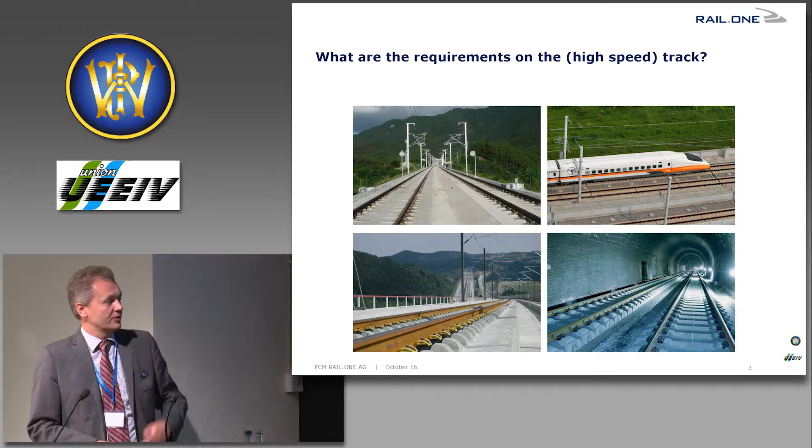Finally, we expect the perfect alignment. To drive 300, 350 kilometers per hour, finally the only requirement is the alignment. If we have the perfect alignment, the lifetime of the slab track will increase, we get much less problems. This is independent whether we have a quite straight alignment, something on bridges, or this very extreme alignment on Cologne-Frankfurt following very close to the highway, or even restoration of old tunnels.

This was also shown by May already, more or less, what interfaces do we have? We have interface to rolling stock, we have different types of trains, we have lines which are just high-speed lines, and we have lines with commuter trains combined with high-speed lines.

Then we have static dynamic interaction coming also from different speeds, different trains, and airborne noise, track equipment - we have to install a lot of stuff in the track. We need compatibility with the signaling system, with the power supply. But this is all stuff which we can more or less handle in the track, we know it.

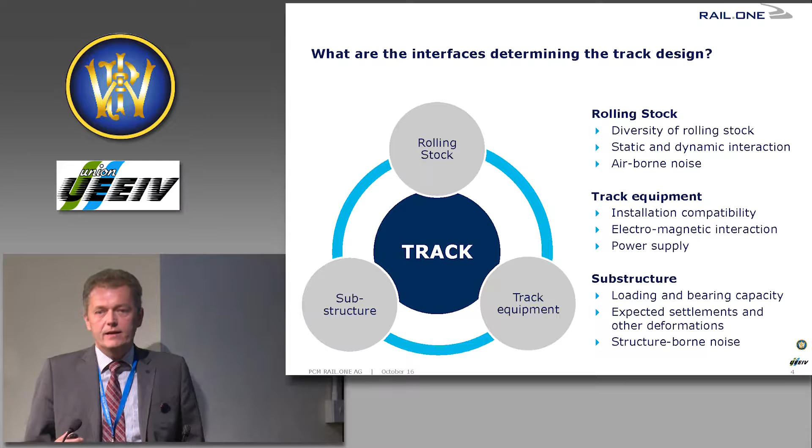The only one we cannot handle anymore after the installation is the substructure. If we don't make it correctly, we cannot correct it. We are lost.

Here two major points are bearing capacity and expected settlements, and I would say the deformation. I would explain later why I see it a little bit wider.

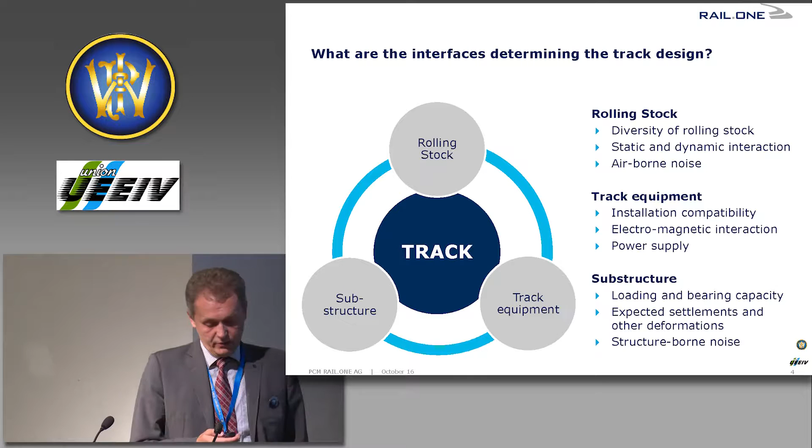What are the characteristics of the slab track? What does the operator later expect? Low maintenance, high availability - of course, I'd like to operate it maybe 20 hours a day, I don't have time for maintenance. Increased service life, lower life cycle costs - we're talking about 60, in the meantime 80, 100 years of operation of the slab track.

Also here, low structure height and weight of the slab track - am I able to improve or simplify the construction of civil structures, bridges, due to the slab track, yes or not? Finally, high lateral resistance. We design the tracks for 200, 250, 300 km per hour, but maybe later we expect to drive faster on those tracks.

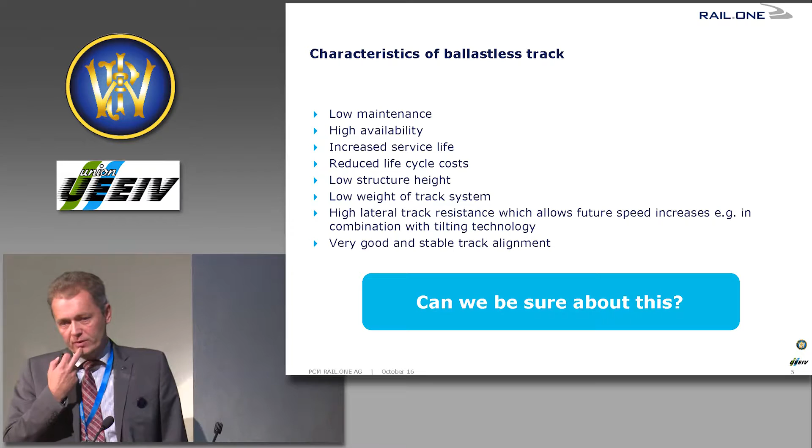Finally, like mentioned, we expect a very good alignment. And can we be sure about it? If we build that track, can we ensure it for the client, for the operator?

I think yes. This is a very old graphic from the 90s. It shows the quality of the track in one section of 3 kilometers of slab track, and two adjacent ballasted sections. After construction in the 90s, the quality of the track is almost the same - the lower the number, the better the quality of the track. But finally, the quality of the slab track remains the same.

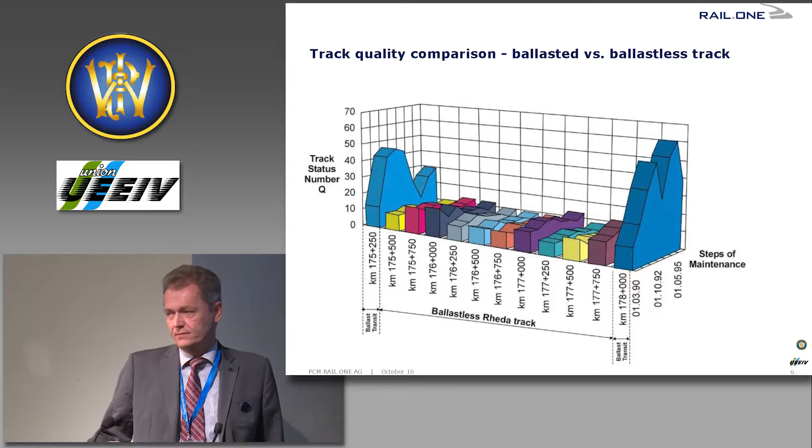The quality of the ballasted track becomes worse and worse. After tamping or renewal, you can improve it, but you will never reach the same level. But there is one secret behind it - this section is in a tunnel, we have very stable underground as well. It's not just the ballast, not just the deformation from the ballast, it's also very limited deformation in the slab tracks.

So how is the structure on the different substructures? In general, coming from the slab track side, you can divide the slab tracks into two major groups, families. One is all the concrete-based monolithic slab track systems - if you take a Rheda, a Bögl, a Porr system, let's say, all in the same level. The other is directly supported ballastless track systems, which are usually based on asphalt layers. They can also be placed on concrete layers, but here there's no bond between the sleepers and the bearing structure.

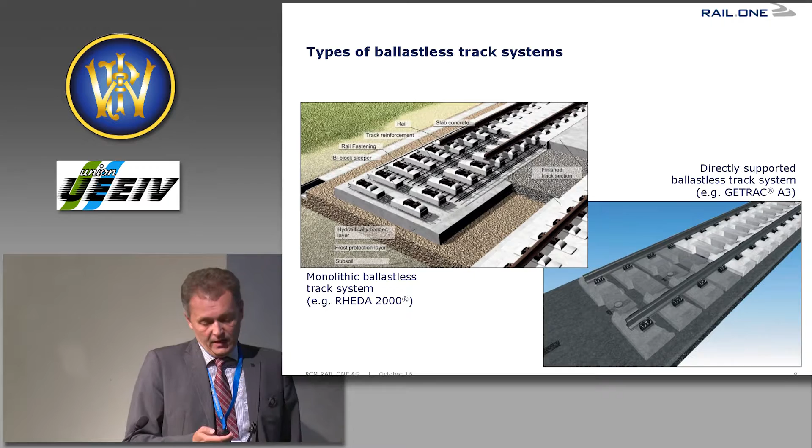And now coming to the substructure, we have in total 3 different types, already mentioned: bridge, tunnel, earthwork.

How is the bridge? Since the beginnings of slab tracks on bridges, there has been a certain requirement to separate the slab from the civil structure. This comes mostly from safety reasons in case of derailment, to be able to replace the slabs very quickly, so there's a separation between the slab track and bridge infrastructure, with some fixing elements.

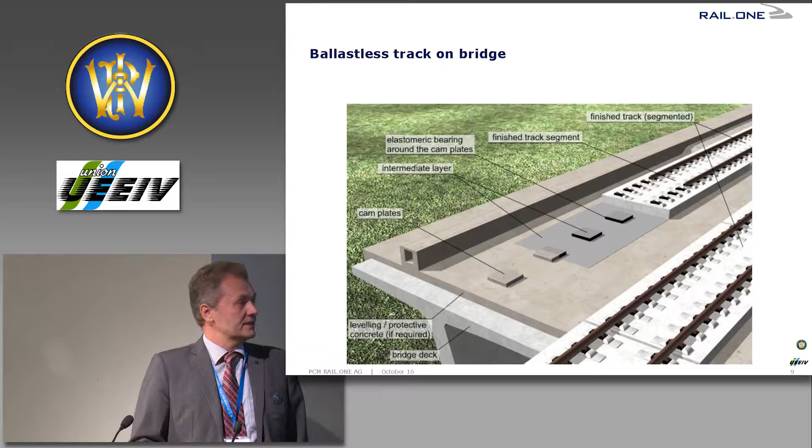Here's the typical engineering cross-section again. It's a bridge structure with a protection layer. That depends on the bridge design - do I need it, yes or not? There are countries which do not require this protection layer for the slab structure, and here this level is separated. Important: there is no standard solution for slab track on bridges.

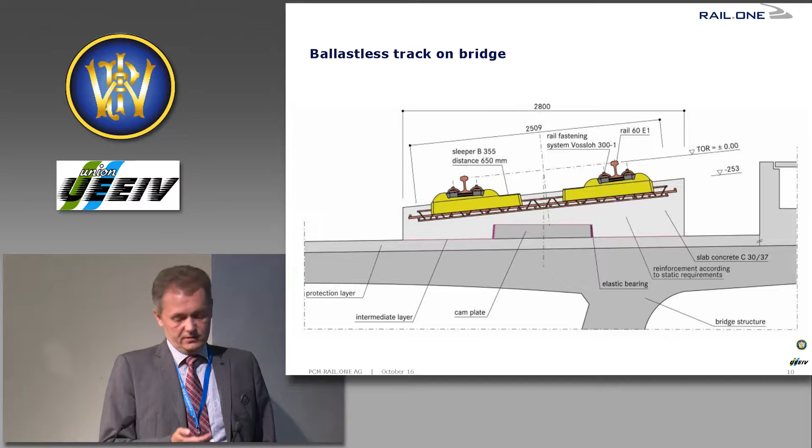I always have to design the slab track considering the properties of the bridge. For a short chain of single span bridges with 30, 32, 24 meters, I can provide a standard design, but for long bridges, if I want to avoid expansion joints, I have to consider the deflection of the bridge. There will always be a modified solution for bridges.

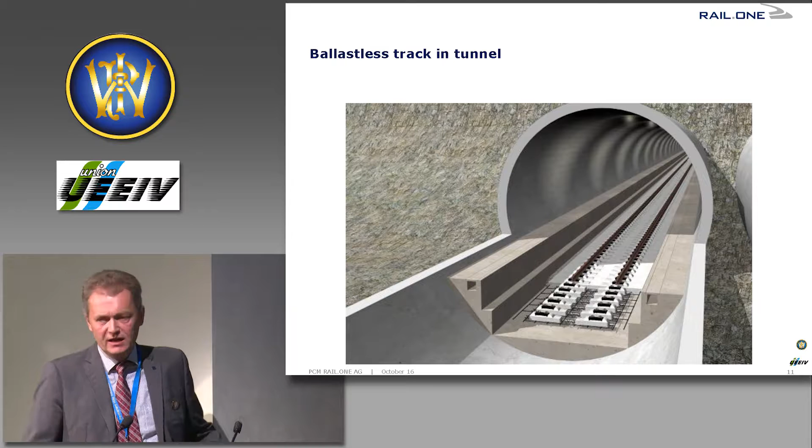Tunnels, finally the perfect basis for the slab track. In a new tunnel we most probably have hard rock around. The shell of the tunnel is also very, very solid, infilled with concrete. So here I do not expect huge problems with installation of the track. I can place the track directly on the tunnel base.

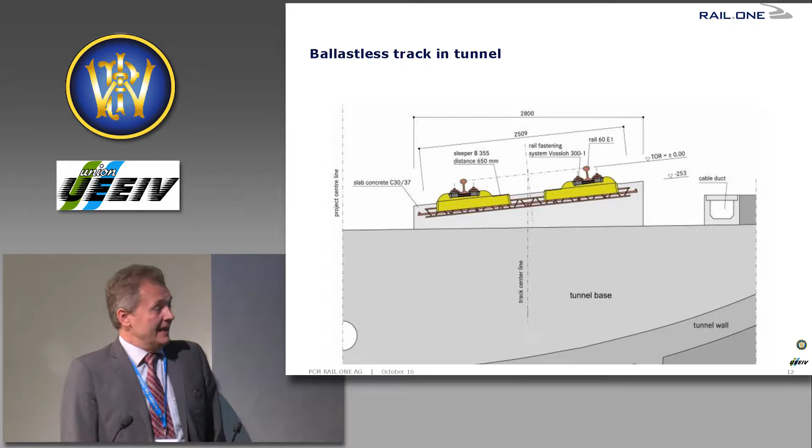The risk is very, very limited. But what's the most problematic? They are definitely the earthworks. If I try to construct the slab tracks on earthworks, I have to consider multiple effects.

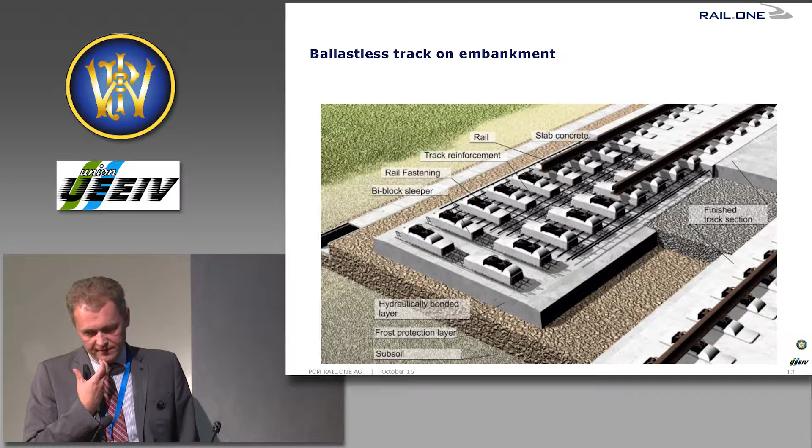How is the principal design of the slab track on earthworks? I usually have the track slab, then the hydraulically bonded layer, and some layers below it. It's a kind of multi-layer system where I'm distributing the loads from the top to the bottom, and have to distribute them to the load as well. So in this area, with the fast standing system - slab, HBL - definitely no settlements, nothing. I can be almost sure about it.

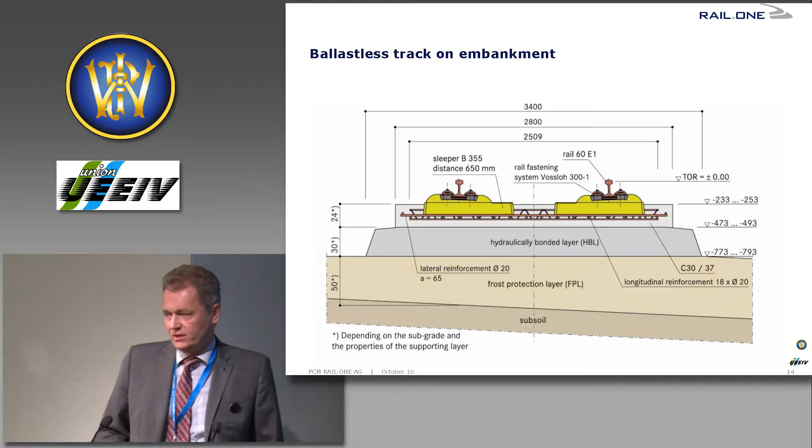Problematic is this area. I have to take care about my substructure so as not to lose in the fast standing system the ability to still compensate, but this is already, as mentioned, very, very limited.

Let's go to the settlements and deformation in the substructure. What can happen? Definitely the substructure is the risk of the owner. That's a quite straightforward situation.

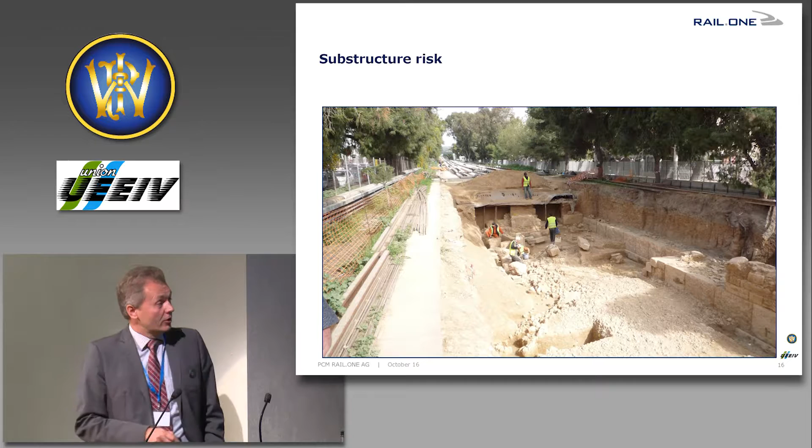Our project in Greece, in Athens, we did an investigation every 100 meters. But the Greek guys always say, if you construct something in Greece, you will find something. What we found here was quite an important point of Greece, described in the old books - there's a point in Greece from which all the distances in Greece have been measured in the past. The guys stopped on the construction site for more than 6 months - there was no way to overcome it. So, just a quite funny issue. But finally, what we'd like to express is that the risk of the substructure has to be investigated properly.

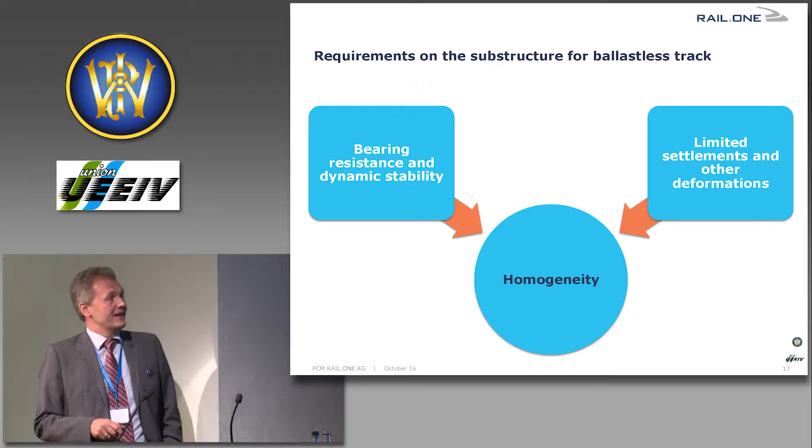As also mentioned by Nay already, we need a homogeneous substructure, and this comes from two points. One is the bearing resistance and dynamic stability of the substructure, and another is the limited settlements and other deformation in the track.

Where do the deformations come from? If we construct big embankments, I have deformation at different points. One is the deformation of the subsoil at the bottom, due to the weight of the embankment itself. Then there's the deformation or compacting of the embankment itself. And the last one is the deformation due to the dynamic loads of the train. They do not occur at the same time - I have to consider them. During construction, I have just the first two.

Constructing this embankment, I have settlements in the subsoil. I'm waiting, settling here. But what happens after the start of operation? I still have settlements, but now coming in all three parts. There's still some settlements expected here, still here, and the additional one coming from the load of the train, from the loads and vibrations caused by the train.

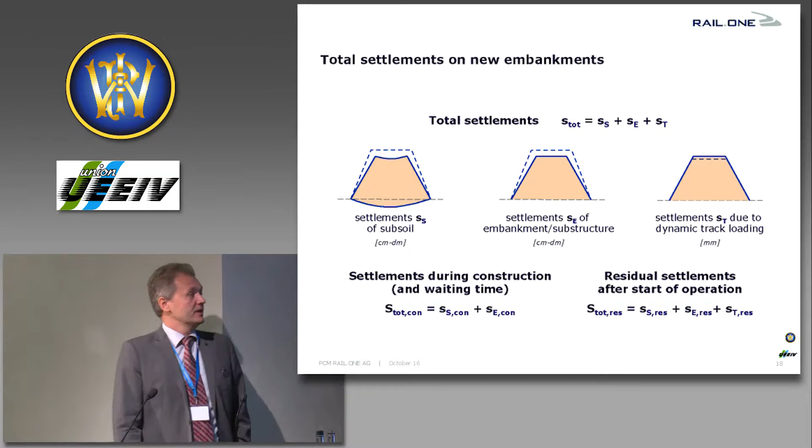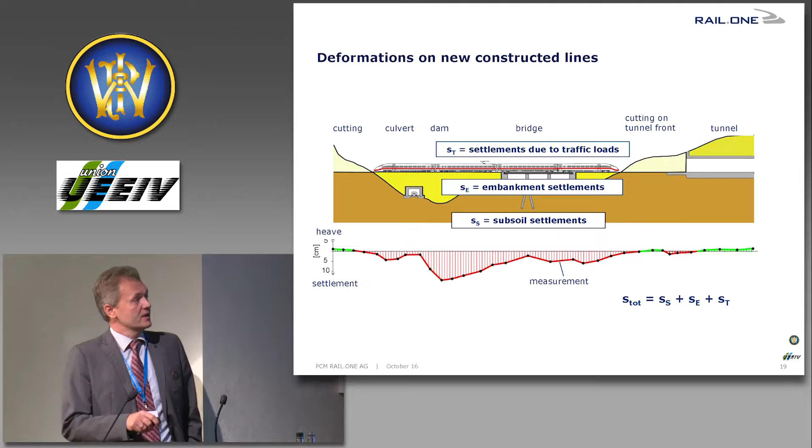How big they are, or which deformation do I have? Yeah, standard situation on the high-speed lines: we try to have a very smooth alignment, meaning the number of bridges and tunnels is increasing. The embankments become bigger, so in the cuttings we can expect some heaves. In the big embankments we have some settlements. Maybe over the culverts they are more stable, so I have less settlements. On the bridges, depends on the foundation, it can be different. Then we have some transition areas. In tunnels maybe we have some heaves as well, because we're removing material.

What we have to do is important, because these contracts are usually separated - the slab track contract and the substructure contract are different. So I'm very happy to hear that HS2 tries to see it as a combined system, considering all the parts. But finally, I have to make a design for all my earthworks.

What do I expect? What is the subsoil if I'm constructing the embankment? Then I'm really constructing, and then I have to wait - I have to wait if it settles, and then measure it, if what I've predicted works. And then I check my deformations, if the residual deformations are smaller than predicted. And this is the point where I can start to construct the slab track.

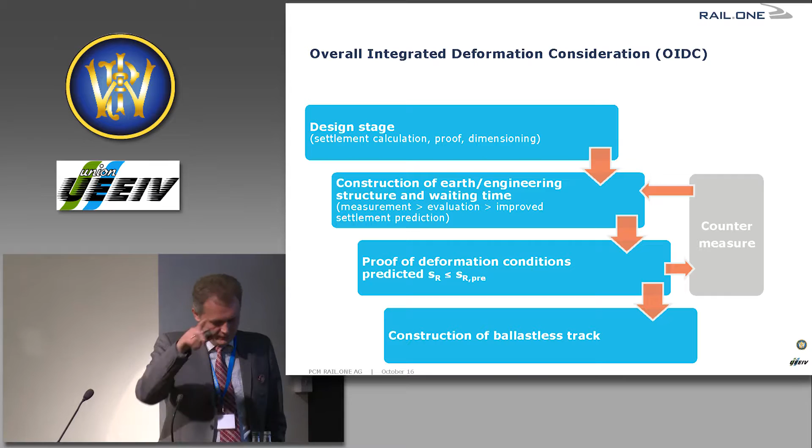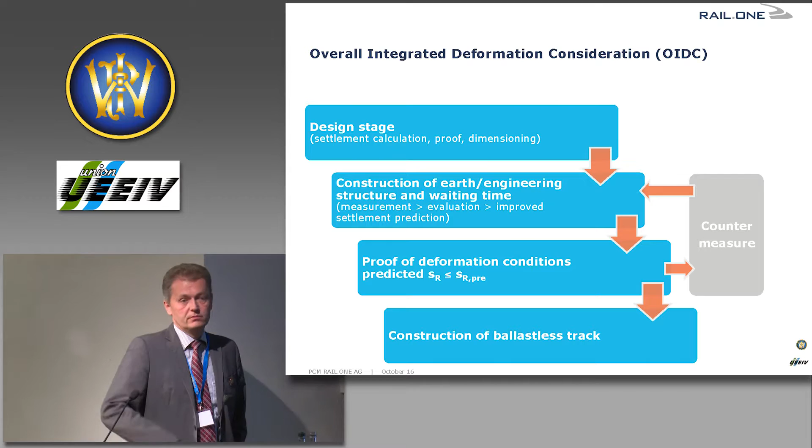I've spent 1.5 years in China designing the Wuhan to Guangzhou line, and there was the famous question from the Chinese designer: how long do we have to wait? 3 months? Or is 6 months definitely enough? It's like, no, you have to make an observation - but we need a number. So there was discussion round and round. If we do not reach this requirement, maybe we can make some countermeasures, preloading, improvement of the substructure.

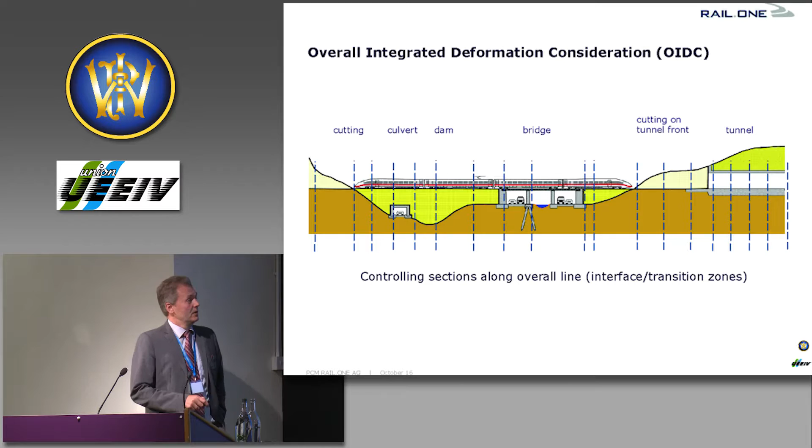Where we have to investigate - a lot of points, definitely, on each cutting, on the transition areas, on embankments, not only one, two, three but in continuous distances, on all foundations of the bridges, and also here transition to the tunnel itself. It's a lot of points that I need to see.

So finally, on the earth structures, transition zones and backfill areas, and on engineering structures, it is important to separate the settlements in the foundations of the bridges from the deformation of the bridge itself. Do not mix them together. Really take a look at the foundations, how much my bridge is settling, and later consider the deformation of the bridges in the slab track design.

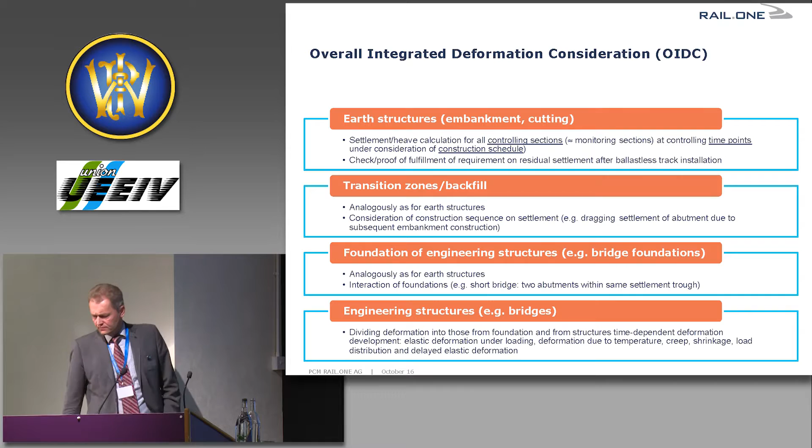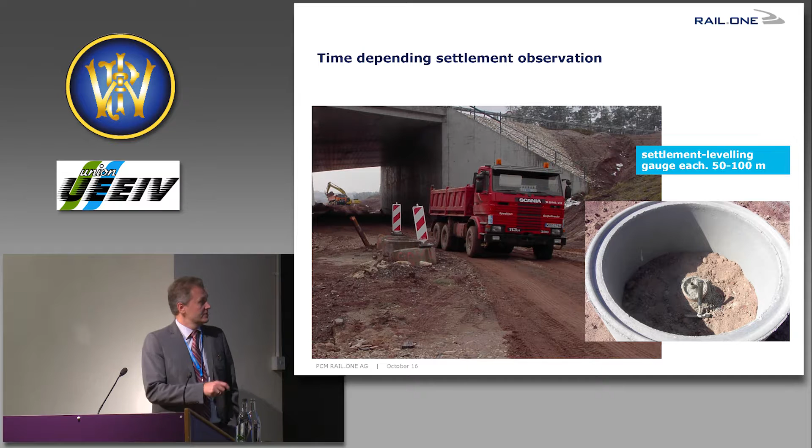The construction guys on site are not really happy about it, because usually you use settlement leveling gauges which are fixed on embankments - you can see it here. Usually on quite stable known structures you can place them every 100 meters. If it's sensitive and you don't really know what happens, maybe you have to place them every 50 meters. For the construction of HS2, or even here in Nürnberg-Ingolstadt, you have a lot of points to observe.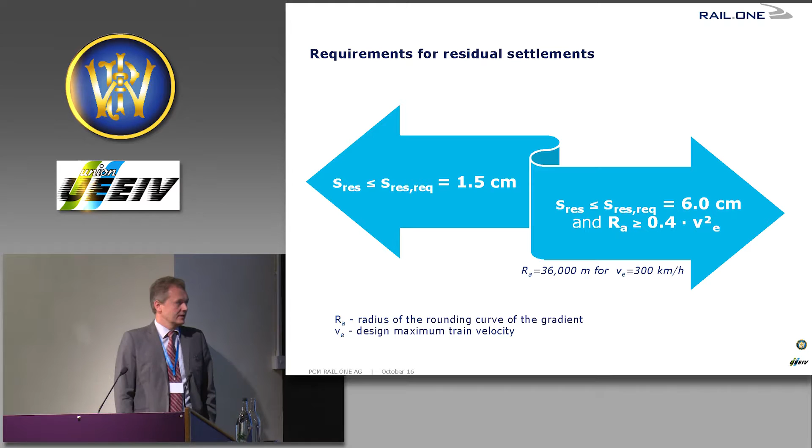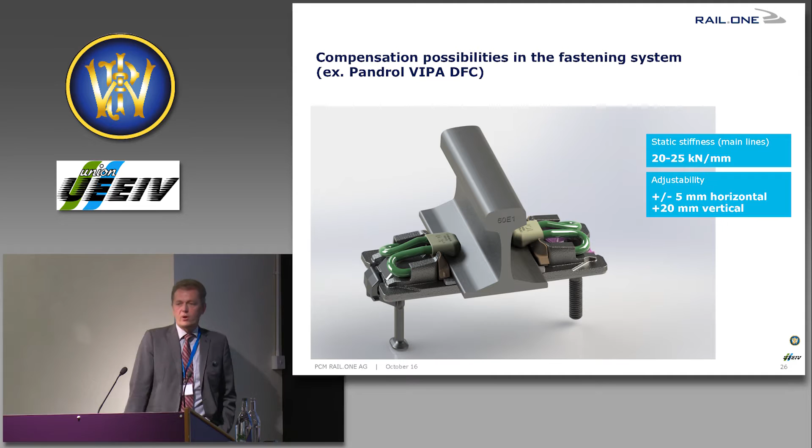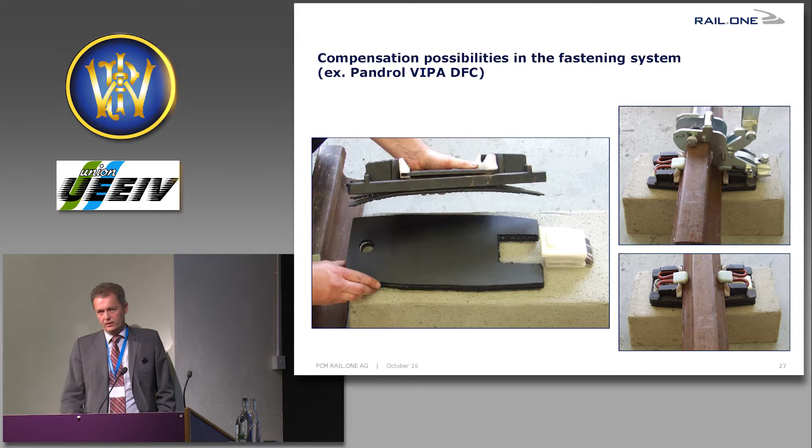Second point: compensation in this range in the fastening system. It's also an economical issue - I have to go into the track, and the components I have to install there are also not that easy, so finally we should focus on this part. All the modern fastening systems have highly elastic fastening, typical stiffness for high-speed lines on the main lines, with certain horizontal and vertical compensation possibility. But some of this I have to keep from the construction itself, so only part remains for maintenance later on. Usually it involves a dismantling of the fastening system, introducing a kind of shims - you can adjust the height in the millimeter range, and assemble it again.

Which situation can you compensate in the track? We have, for example, the typical curve of an embankment, a dam, and here a cutting. Here most probably we expect some settlement, and here we can expect some heave.

So here I can underlay some compensation plates to bring the track back to position. But here I have to readjust my alignment and bring it to the new level, considering this heave.

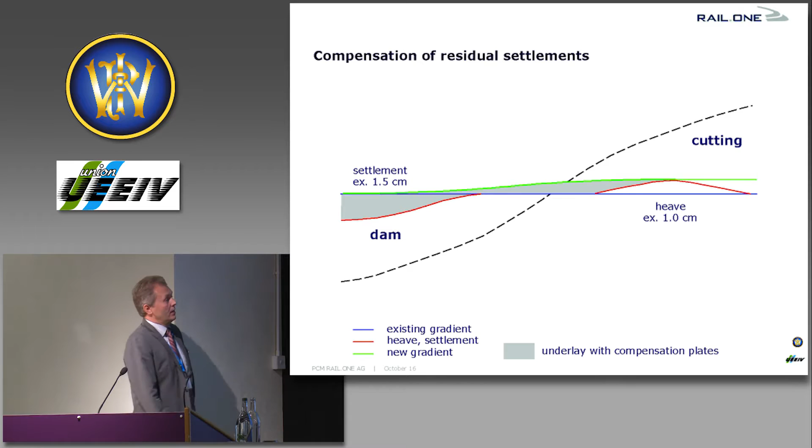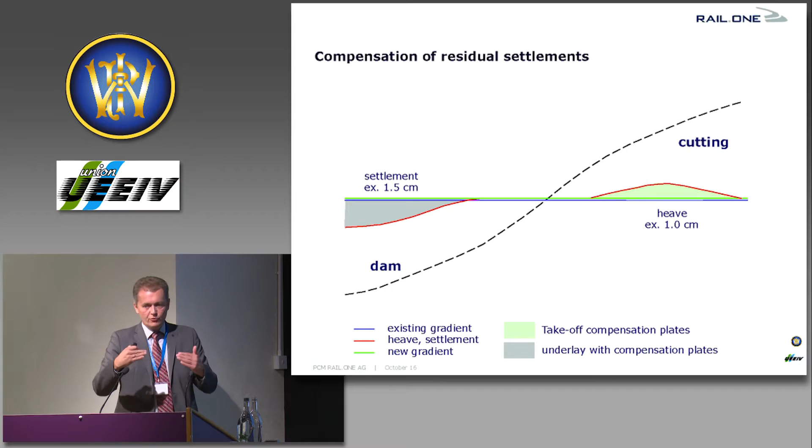What can be done as well? If you expect heaves, there is also a way to install the fastening system with a different arrangement, so that when the heave occurs, I can remove some plates, so that finally, in the final assembly, I have the alignment that I want.

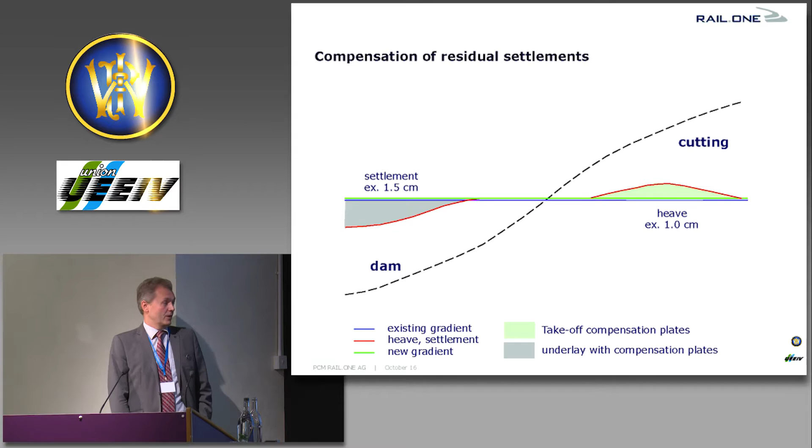That's a little bit of the theory. I'd like to bring the focus to the substructure now, and show you some cases that we've faced already in the past.

HSL Zuid in the Netherlands. This was a project where we knew from the beginning that the substructure is extremely poor. We have just sand or something, nothing stable. So the decision was made to build so-called settlement-free plates.

What has happened now? On the side of the track, a new highway has been built with a huge abutment, and right now, the whole track has started to move sideways.

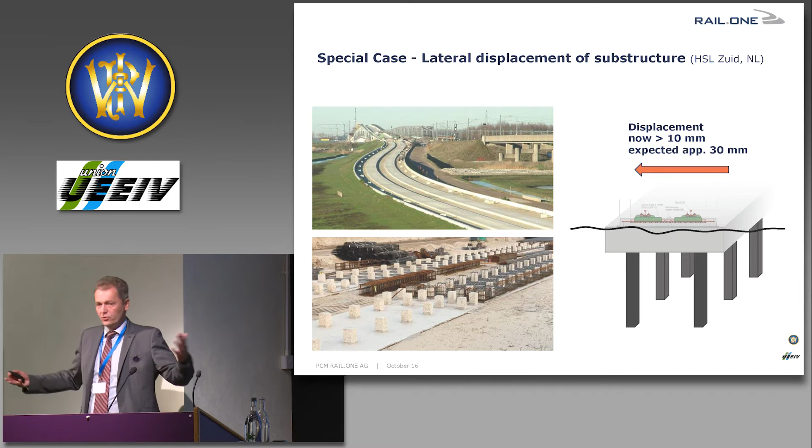Right now, they are in the range of 10 millimeters. The prediction shows that they will reach 30 millimeters. We've started a huge development to solve this problem, but there's really consideration also to take a look left and right of the track.

Nürnberg-Ingolstadt, you can see it's following the highway A9 in Germany. Quite a huge cutting, I think 5-6 meters, something like that.

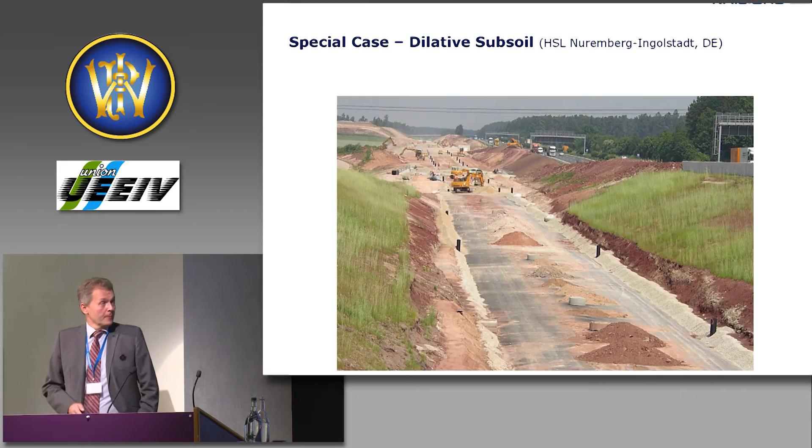After removing the load and the soil absorbing water, it started to lift up. The final measure was a replacement of the subsoil between 0.5 and 2.3 meters, covering it with asphalt, providing drainage to avoid new water getting in, and then starting construction of the slab track with the typical frost protection layer, HBL, and the track itself.

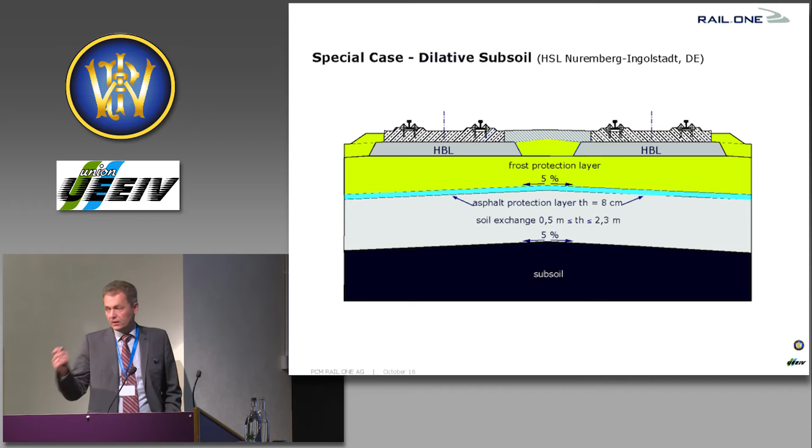The next one, also Nürnberg-Ingolstadt. Here is a small cutting, and here is the so-called Auerberg, a very, very flat back hill.

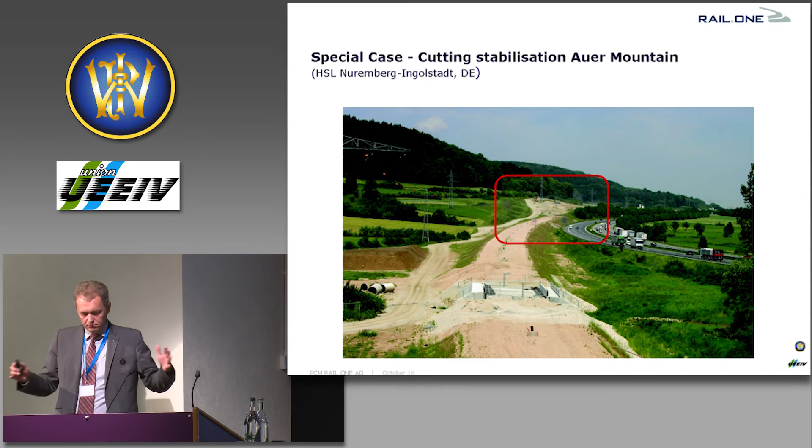What happened? This green material tended to slide. It was stable until this blue layer was also disturbed. Due to the construction of the small cutting here, it was weakened, I think.

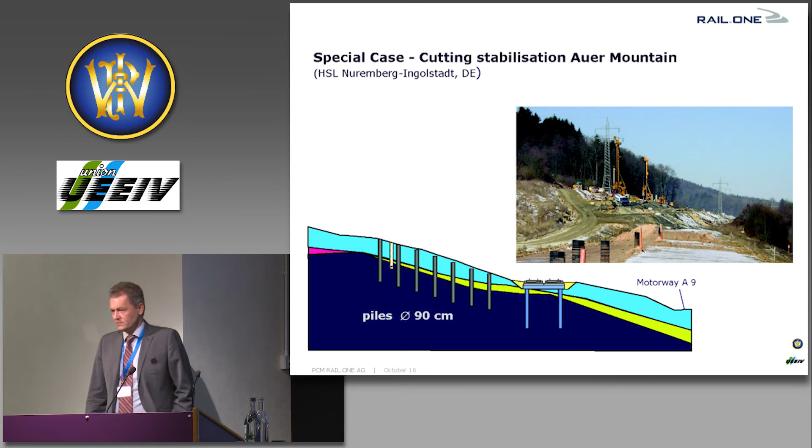The guys on site recognized this area started to move, starts sliding. There was no other option - some of it had already been found on the track. So a huge measure was needed for stabilization of this small hill to prevent it from sliding onto the track.

And the last one, also from Nürnberg-Ingolstadt, in karstified regions. Some hollow rooms have been found under the track.

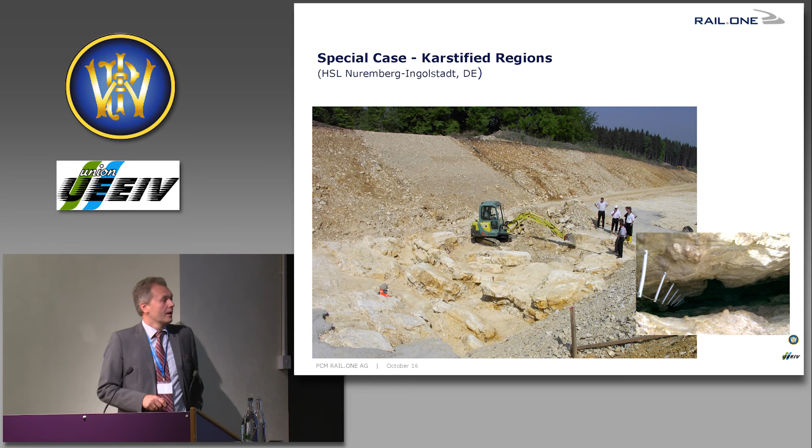It was a huge issue in the newspapers. The Yellow Press mentioned that the German DB has to build bridges in the tunnels. But this was really an issue - we found a lot of them.

A lot of simulation has been made to investigate how the embankments on top of these cavities work. Different measures with geogrids and improvement of embankments have been made. But it also had a huge influence on the construction and design period. So Nürnberg-Ingolstadt was not that easy.

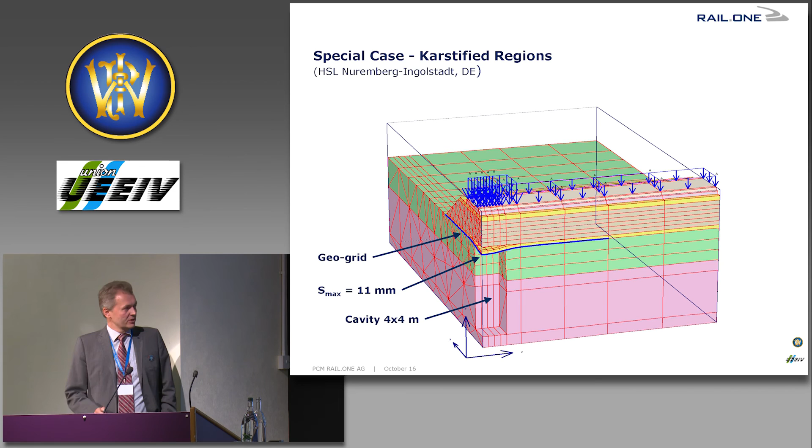So I would like to bring the focus of the owner to take extreme care of the substructure, because I think slab tracks are really good solutions for high-speed lines, but without the proper subsoil, we are not able to get the advantages of slab tracks. Thank you very much.